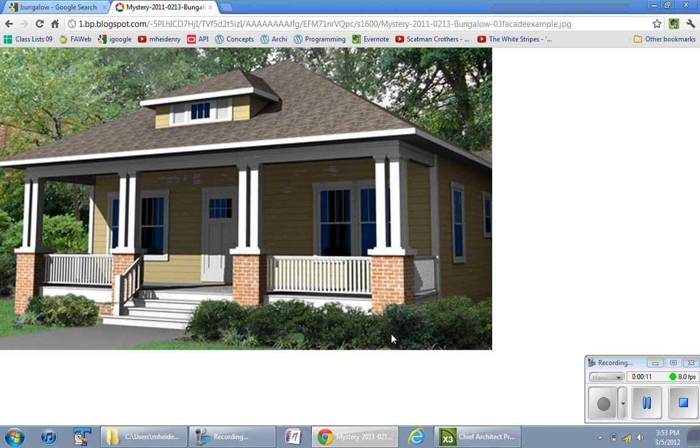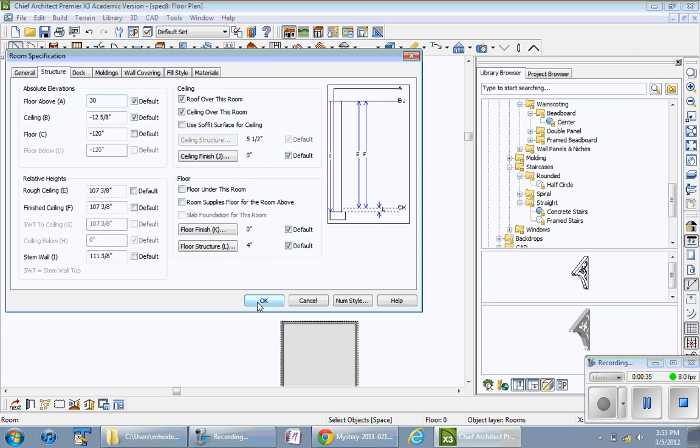First thing I'm going to do is delete our slab, we're not going to need that. Then I'm going to go down into the foundation of the house, double-click this, open it up. You'll notice the floor above is right at 0. Since we want to raise that, I'm going to take it up to maybe 30 inches above. Click OK, and then go up to the first floor.

I'm going to zoom in, and then using invisible walls, I'm going to frame out a front porch. It's a little over 5 feet tall, about as wide as the house, and then down.

If you have automatic rebuild roof on, you'll notice the roof lines show up. But I would like you to still go in and change this to a porch under the room specification. This way it'll ensure to have a roof over it. If you make it a deck, it doesn't necessarily have a roof.

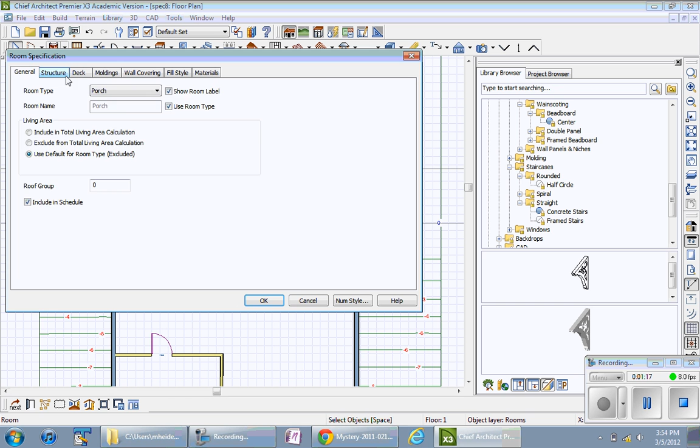Then let's open that up, or keep it open. And we want to make sure we move that floor height up so that it mirrors the rest of the house.

We'll take a look, and if we zoom out, we've got a little gap under the porch between our new floor and the ground.

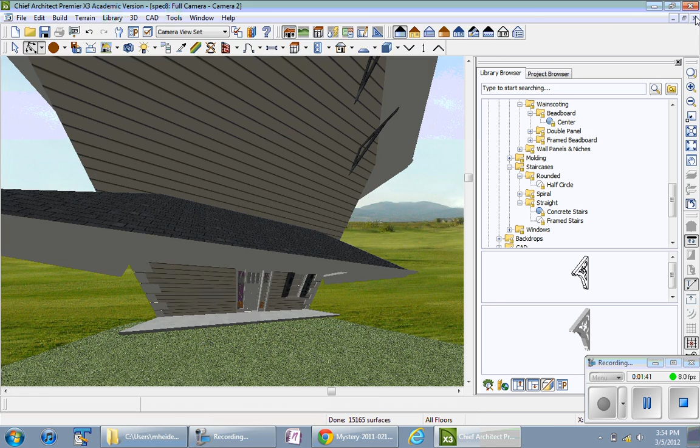So what we can do for that, go down into the foundation, hit F9, which shows us the floor above, and we can extend our foundation wall if you'd like, or there might be a way to put some wood facing or paneling on the front if you want it that way.

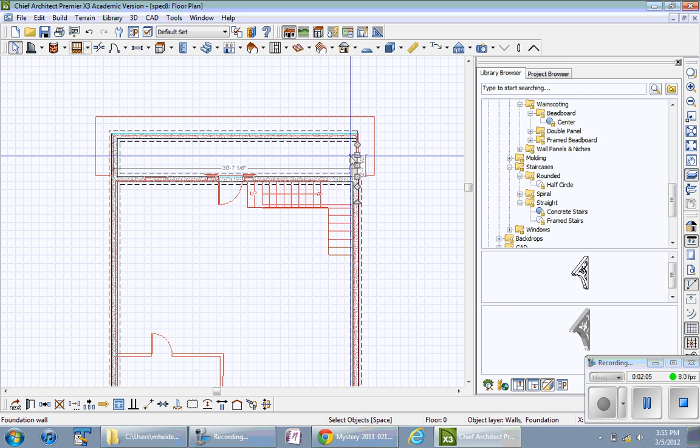I'm going to draw a foundation wall, and I'm going to make sure those connect. I'm going to open this up, just make sure floor above is 30. All right, go up to the first floor.

And now let's take a look. All right, so we have a gap there we can take care of. A little bit later, I think underneath the porch we had some soffit which was hanging down. We can get rid of that later as well if we need.

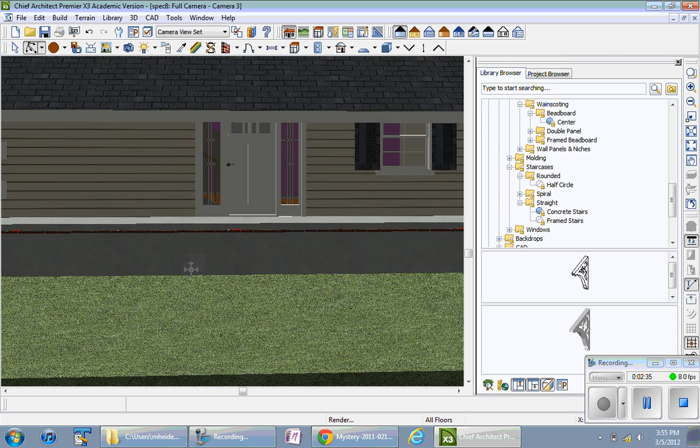Our next step is going to be to install some stairs. So I'm going to go to stairs, click on click stairs, which doesn't give us a full staircase, it's more of a multi-step option.

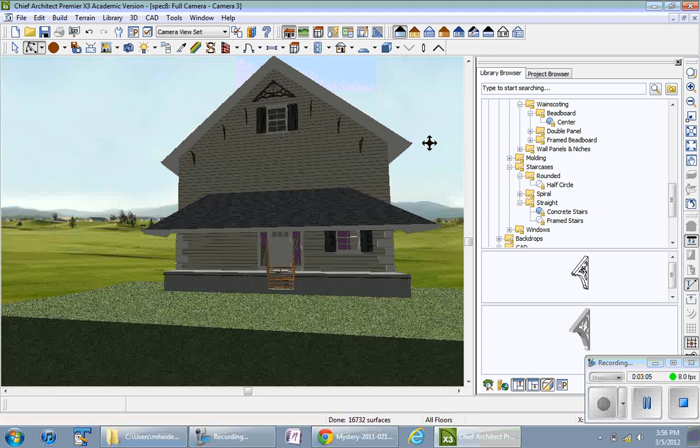And it looks like it made it backwards, so I'm going to go into my two-dimensional view and redo this.

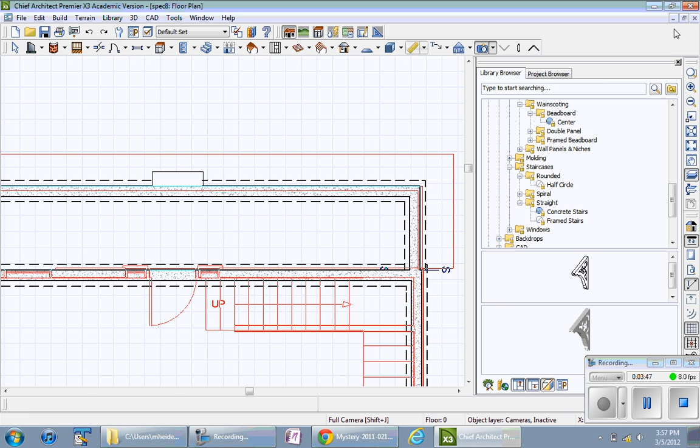Notice it's on our foundation view since we're building up from ground level. Although I don't think that's going to want to work, so I'm going to undo that and throw it in on our first floor since we want it attaching to the porch.

There we go. Then go ahead and make it as wide as you would like. If you want a little bit fancier, you can flare the edges.

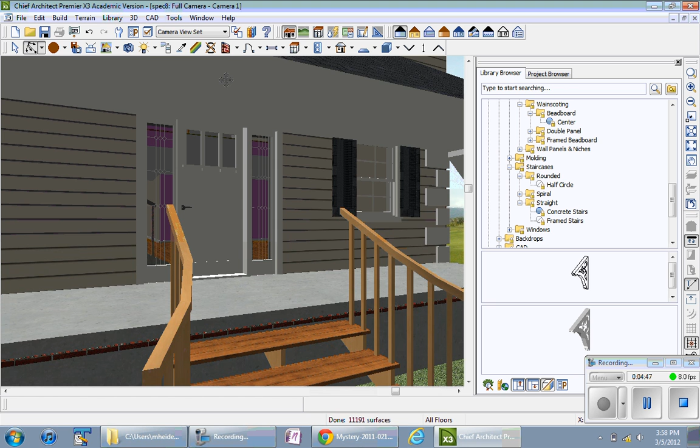And you can also do a starter tread if you would like. I'm not sure what that does, so let's take a look. All right, pretty sweet, but doesn't work with our house yet.

So I'm going to double-click, go to Style, and uncheck open risers and open underneath. Once you hit OK, you'll notice the gaps in here close up.

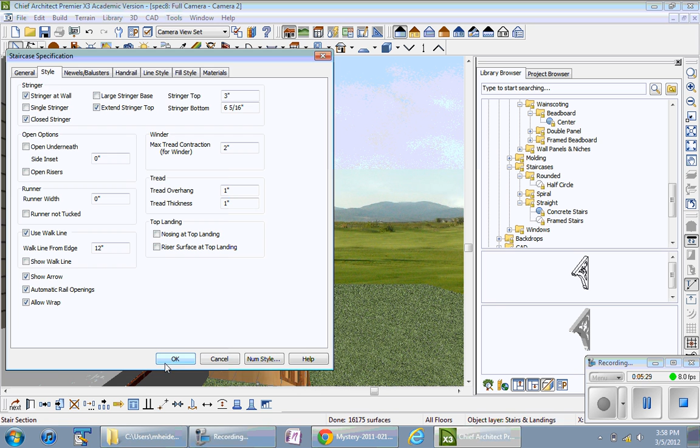And if I change views, we have some sort of paneling or something on the side. We can change that further by doing what are called, I think it's a closed stringer. That puts more of a closed edge on the staircase.

Later on, when we're done with the porch, we can make the materials align. But I'm going to go back into the handrail staircase, go into the handrail, and we can select here more specific handrails.

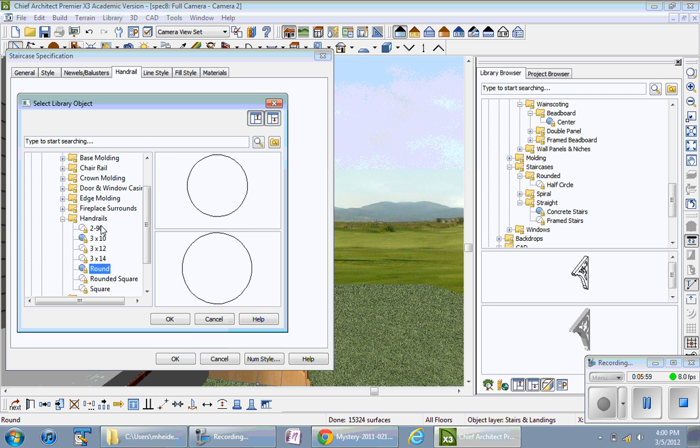So there's one, I have several downloaded. If you want round, 3 by 10, let's see what that is. That's a bit much.

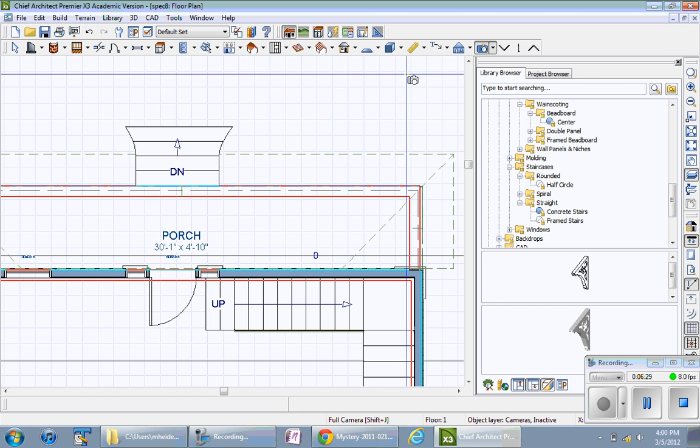So you can change it a bit if you don't want handrails on both sides, like the picture. You don't necessarily have to have it. And then what we want to do, I'm going to go back for a front view.

Now what we're going to need to do is add some pillars to the house. If you look at our sample house, looks like they have some foundation pillars with some posts on top. So let's see if we can't find some of those in the library.

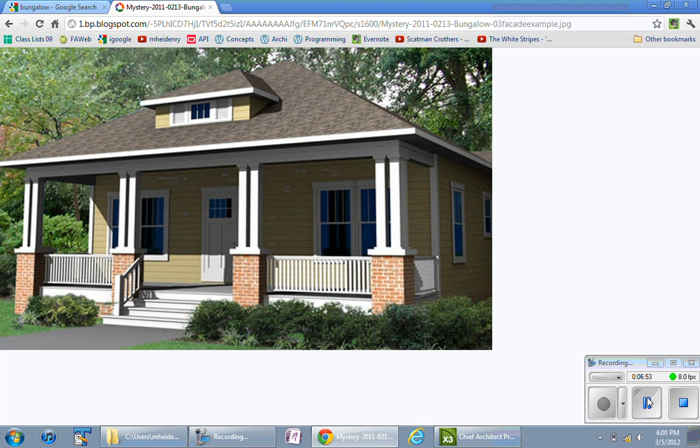So with the library open, I'm in millwork, and balusters, newels, and posts are where you find everything. We can probably find some columns as well, that's a little farther down. Ooh, stacked columns, that might work for us.

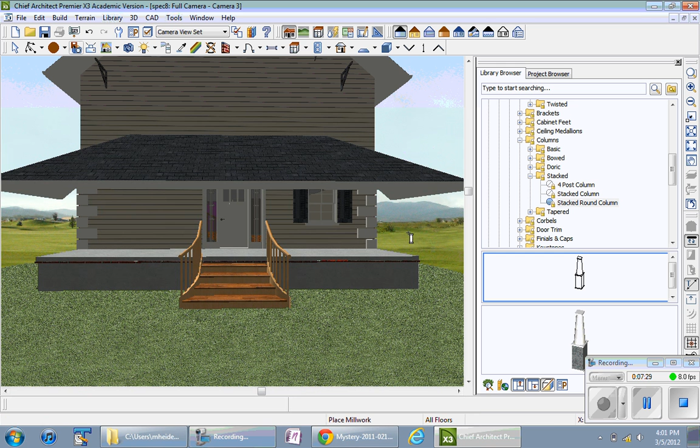I'm going to go with this one, download it. And once that's ready, I'm actually going to switch to the blueprint view for this. Zoom in a bit, and we can drag some of those into place.

So we'll get one there, and maybe one on either side of the staircase, and another one in the corner. And then take a look.

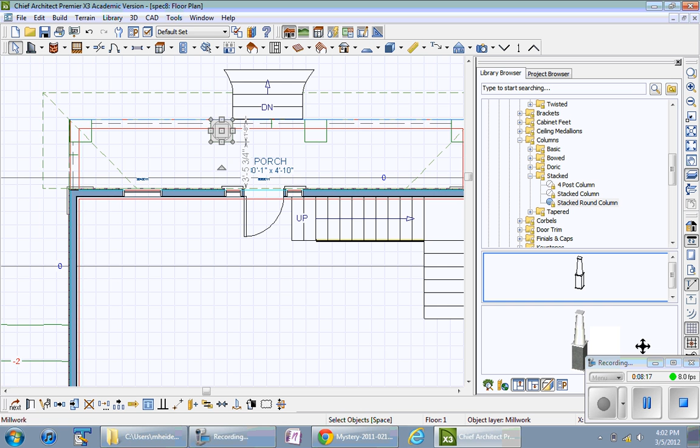And that one I'm going to have to move back. You can use the keyboard once again for real fine movements. All right, so that looks better already.

Now, say we wanted to go with a white wood here. I might steal the color of the posts and go ahead and paint what we can.

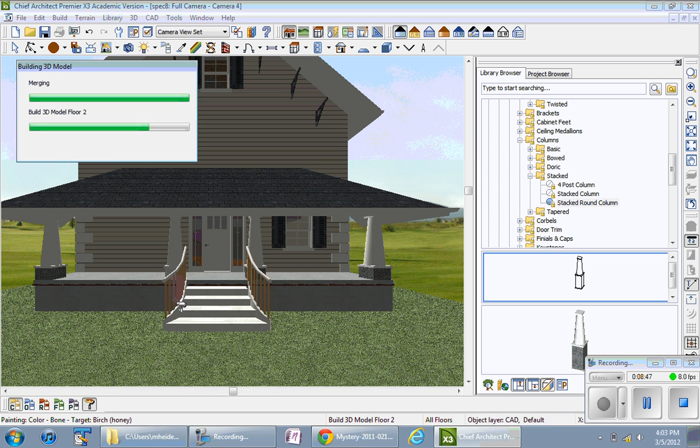All right, that seems like a bit much, so I'm going to go in and change this to brick.

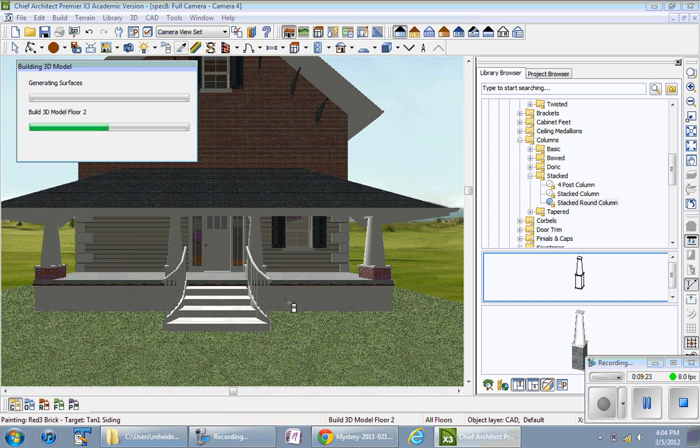Okay, so I found kind of a coarse red brick. I'm going to steal that color and make the base of the pillars brick, front of the house, and maybe underneath the stairs. So it's your call on how you want it to look, but certainly a little better than before.

I'm going to change views now. I'm going to kind of zoom in if I were in the porch or standing on it. And notice how at the top of the porch, the soffit from the ceiling hangs down.

I'm going to double click on that and uncheck ceiling over that room. Hit escape to deselect, and hopefully that works.

I'm going to change views. All right, so it looks like we have a little more room there. I'm using my tablet, so the graphics aren't as good as the computers you're using.

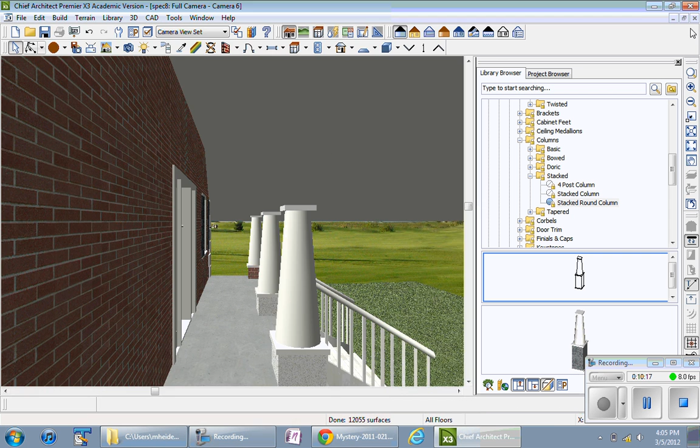But taking us back out to the front, let's see what we have. You can fine-tune the stairs if you need to. Right now it looks like those are giant treads compared to what we have here.

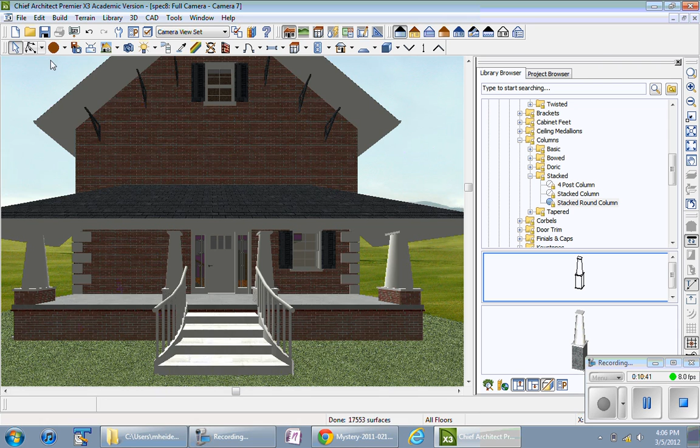I might have overdone some of the base tread work. Let's see, I think that's about it.

And if you wanted your columns higher, say you had dragged in posts and they didn't work, you can click and drag. But off to a little better start than where we were, and we'll save there and stop today.